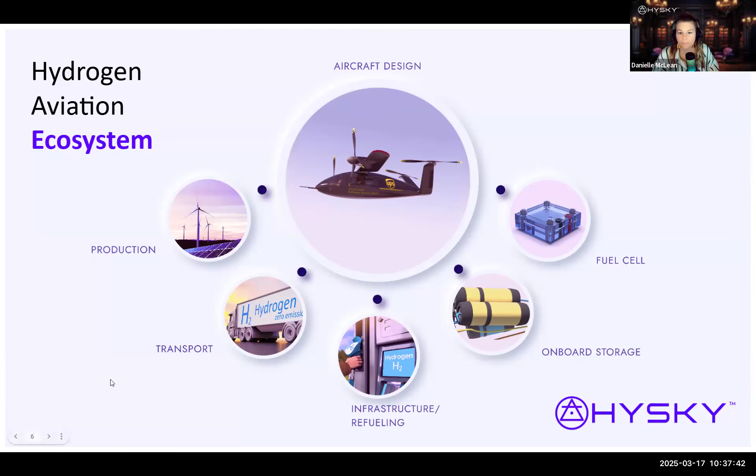Thank you, thank you. So speaking of that hydrogen aviation ecosystem, daily I am asked by somebody to introduce them to somebody else that I know. And we've been asked at least 100 times to build this ecosystem, to build this database. So we've started building it. And if you would like to be listed in this database, if you're looking for a product or service, or you're selling a product or service related to that ecosystem, then go ahead and complete this form. And I will stick the link in the chat.

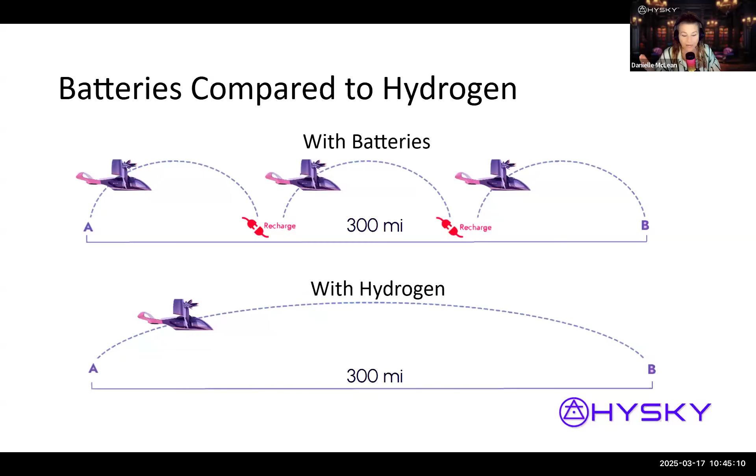Like I said, you can replace this eVTOL with a drone or a fixed wing aircraft. If you're looking at going 300 miles, you can trade out your distance for time and look at endurance. If I'm going 300 miles, I have to stop and recharge at least twice with batteries. On the other hand, if I'm using hydrogen, I can go from A to B, 300 miles on one fuel tank, on a fuel cell with a full tank of hydrogen. I can go without stopping from A to B. So that allows me to go to Dallas, go to Austin, go to San Antonio, and I don't have to stop and recharge. I like that.

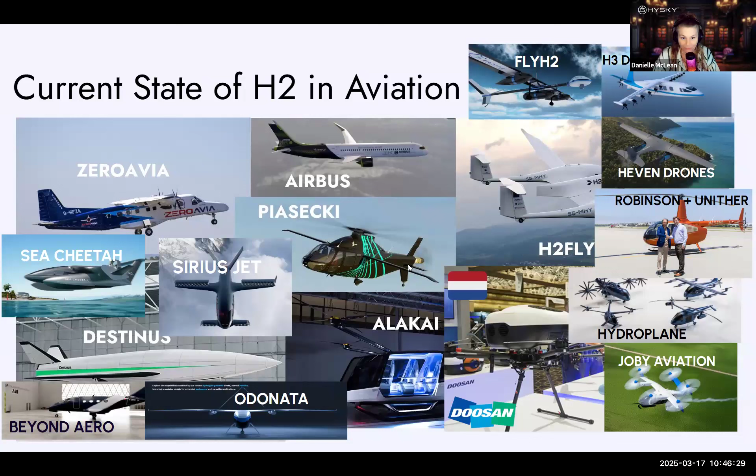And all of these aircraft are going to need hydrogen. Where are they going to get hydrogen? That's where HYSKY comes in. HYSKY's role is to bridge the gap. HYSKY was on there, thank you Dan. HYSKY's right there in the middle. I wouldn't forget John, but yeah, they're there.

It's okay, there's a lot on there. I know, at least I'm like, wait, I forgot Joby. And then I'm like, no, Joby's on there too. But yeah, so where are they going to get hydrogen? That's where HYSKY comes in. HYSKY's role is to bridge the gap between hydrogen and aviation.

There's a working prototype actually working in Hawaii, and it's powered by renewable energy. It's completely off the grid. It absorbs water from thin air and then electrolyzes it, and that can go to refuel an aircraft. You might say, well, that's not going to make enough hydrogen to fuel an eVTOL. Well, you can scale it. It's modular. You can use as many, and you don't need any infrastructure. This thing comes on a trailer.

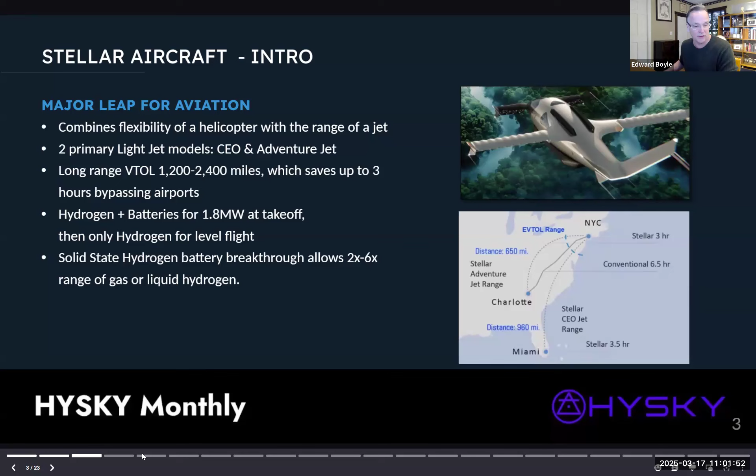So the solid state breakthrough we're talking about is potentially a 2 to 6x gain versus gas or liquid hydrogen. We've tested this - I don't know how many of you have used HydroSticks, which are very small capsules that a lot of drones start with. For some of our initial tests, we just took a HydroStick canister and replaced it with our powder, and we were able to get up to 6 times what a lot of drone users are using right now. That's what our partner in UConn is using, so we're going to deliver that to them as something to immediately extend their range.

So the team is something that impressed me right from the get-go. Alexei's family company has been working with Antonov for almost 100 years on creating some of the best planes in the world. The AN-225 has something like 120 world records for the largest aircraft. It carries their version of a Space Shuttle around on the back of it - it's down here, it has 6 huge turbines on it.

The president of Antonov actually came over and decided to join us as our aviation head. He's been designing all these planes, and he's come up with a medium size aircraft where we can potentially fit 19 people and still take off vertically. He's a fantastic addition to the team.

And we brought over a sales team that had been selling Cirrus aircraft, and they got busy and sold about 1.5 million in non-refundable deposits that we took last year. So we're able to fund a decent amount of our development so far on that money, in addition to regular fundraising. And then our pilot team - we have some fantastic Apache pilots, one was an experimental pilot, and another that's an FAA check pilot for United. Between these guys, we're going to be working on forming up our team flying out of Sikorsky Memorial here in Connecticut.

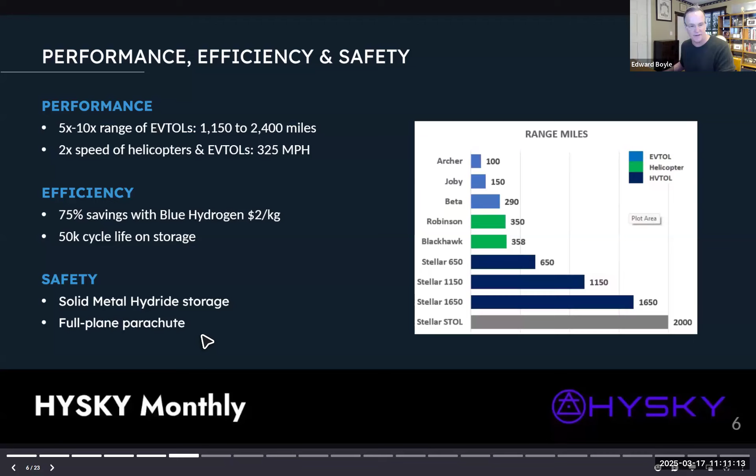We also have a full plane parachute. That picture I showed at the beginning of Alexei, he actually flew his private SR-22 from Portland, Oregon all the way to Ukraine. One of the reasons he bought it is it has a full plane parachute, one of the first ones with it. So when you have rotors up above, you definitely can't use this. This is one of the benefits of a fixed wing design, you can have a full plane parachute.

We were potentially talking with Chris Hemsworth as being our brand ambassador here. We ran into him at an FBO in Australia, and he was psyched about coming on in exchange for a jet. But then when we started dealing with CAA and everything, the deal got a little too rich for us.

The idea here is to be able to land on water. We have dust collectors on all the intakes, so this can land in a desert, go all sorts of places you would not take a helicopter. For the express jet version, we would take out the seats. We have a medevac version with a stretcher in there and a crane and everything like that. So we've thought through these designs quite a bit on how each one would be used.

There are 3 existing patents on the plane: the design of the wing, the overall design of the plane, and the powertrain. Two of them are actually totally in the clear, one is pending. We have other elements like this proprietary cooling, which is really critical for the fuel cells and the batteries. We'll be swapping out the original liquid hydrogen storage with the solid state, which is much smaller in size. We have a lot of other elements that have gone into this that are in the proprietary knowledge base of both Antonov and FED, and a lot of those were not patented in the Soviet Union, but they're all there for us to pick and choose from.

So the solid state, this process has been around for quite a while. It's been used in satellite applications in space for probably 20 years now. But we made some key innovations in being able to fit much more hydrogen within the lattice structure of the magnesium and the titanium. This fullerene we use, the C60, is pretty expensive if you buy it off the shelf, but we've come up with a process of making that from recycled tires that's going to make the whole process much more affordable.

Another thing we do is use microwave and ultrasound to heat the metal hydride at the particle level, at the molecular level. This is much more efficient than heating from the outside, like some techniques have been used in the past. So this is TRL5, it should be TRL7. We're going to use this in our flight in June, and we're going to start using this at some tests we're doing at UConn and Yale right now.

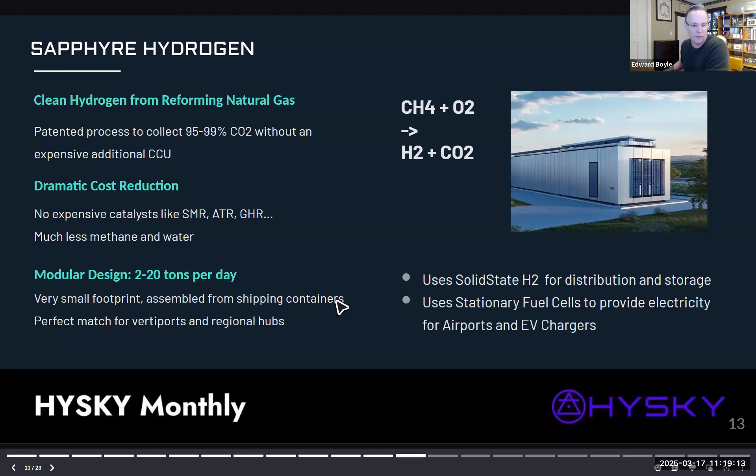So the markets for Stellar Jet are, initially, we're going after this private market where people will actually pay 10% deposits 4 years in advance. This is a very common thing when you roll out a new Gulfstream or other private jets. We get invited to present at the Palm Beach Boat Show and all sorts of places like that, right next to Czinger and all the hypercar markets. So we're actually able to sell these.

We just need to get the flying prototype up and make another big launch, and then we have 600 million in pipeline right now. A lot of people in India love this, but the people in India are immediately asking us to go to 10 or 19 seaters. This airline industry is just booming in India.

And the same thing — a big resort developer in Bali came to us. Australia is a very large market for private jets too, probably the fourth largest after Canada and the UK. We're getting a lot of interest out in Ohio, where Anduril and I guess Joby have set up manufacturing, so a lot of people want to put in vertiports out there and are talking to us about doing different plans.

So licensing is becoming a key part of our business. This might really kick in with the solid state, like way before we get the FAA. But the military and the first responder market, these guys will certify in up to 18 months.

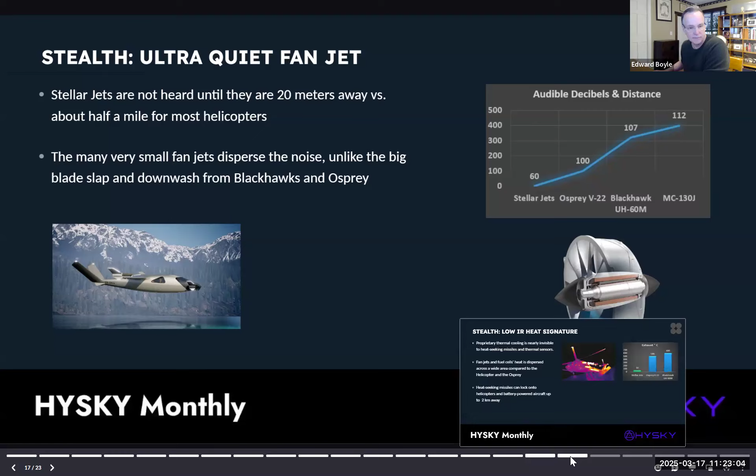The same thing with heat: each of those electric motors is going to have a little bit of a heat signature, but dispersing the heat from the fuel cells and batteries is going to be key, and we think we can do that and add on to that. But having this big JP4 turbine at the top is something they're never going to get away with on

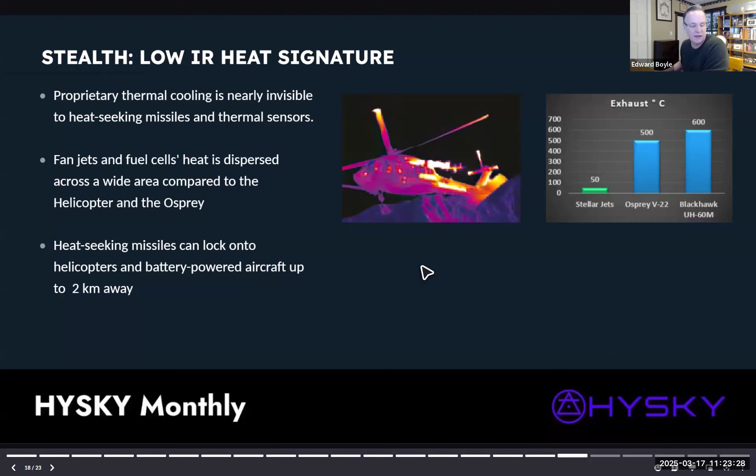jet fuel powered helicopters. Another thing, Alexei, being an aviator, knew the importance of having a pressurized cabin. This easily lets us get up to the 25,000-foot range, which is key for getting across the Alps. That's one of the main private flight routes in Europe, so being able to get over that range matters.

For missions, a lot of the people will, you know, the entire Special Forces mission will be flying 2-3 hours with oxygen on. That's not good at all for arriving at their mission in peak form. So they won't be doing that on the Stellar.

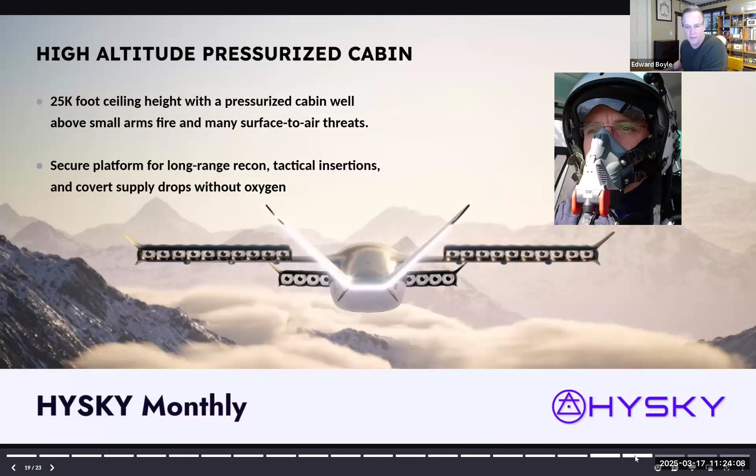So the medevac design is going to have a winch coming off the wing and probably have 2 berths within there. So the goal here would be to get 600 miles out or 200 miles out, be able to load the patient and get them back to a health facility without having to do a recharge or refueling at that location.

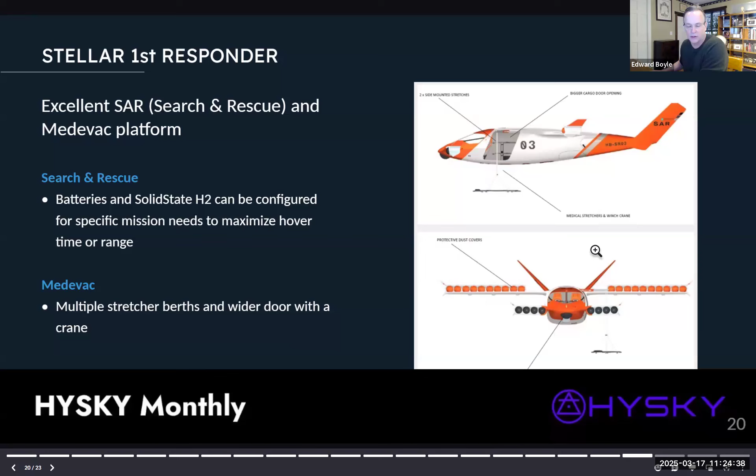So the development status so far, we're at the TRL 5.5 stage. That will go up to the 7.5 stage once we're flying in June.

The drones, if we go that route and really start selling those, we'll fast track this and get to TRL 9 pretty quickly, though each country has its own certification process for drones.

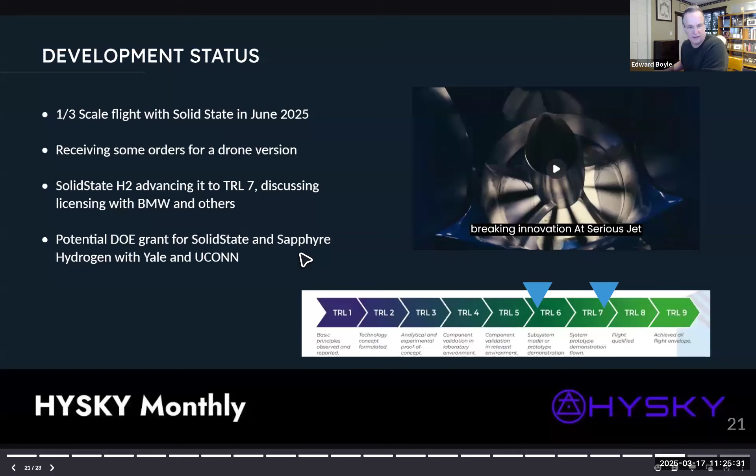The solid state, if we start licensing that to BMW, will also get accelerated to the 7 or 8 stage pretty quickly. And then these DOE grants we're working with Yale and UConn on will probably help us accelerate both the solid state and the Sapphyre TRL process testing.

So that was pretty much it for my planned part of the presentation. I can take questions now or show some additional slides.

Thanks so much, Ed, that was fantastic. Very cool to learn all of those things about Stellar. A lot of us have been wondering.

Okay, so lots of questions in the chat. I'm going to start from the beginning, and I think the first question that I saw, if this isn't the first one, forgive me. Kurt, thank you. Yeah, you bet. Thank you, a couple questions.

I'm interested in the solid state fuel that you're developing. So you're actually flying with a solid state hydrogen cartridge or generator, and you're producing hydrogen on demand from the storage media?

So there's two things. Solid state H2 is making this metal hydride container right here - that's magnesium, titanium, and carbon 60. We infuse that with hydrogen, and then when it's being desorbed, we heat that up with microwaves and use a little bit of pressure.

to get the hydrogen to come out of the solid form and feed the fuel cells right here. And you're getting an energy density of maybe 6 times batteries, something like that? 6 times the gas, 2 times liquid hydrogen - 150 kilograms per cubic meter.

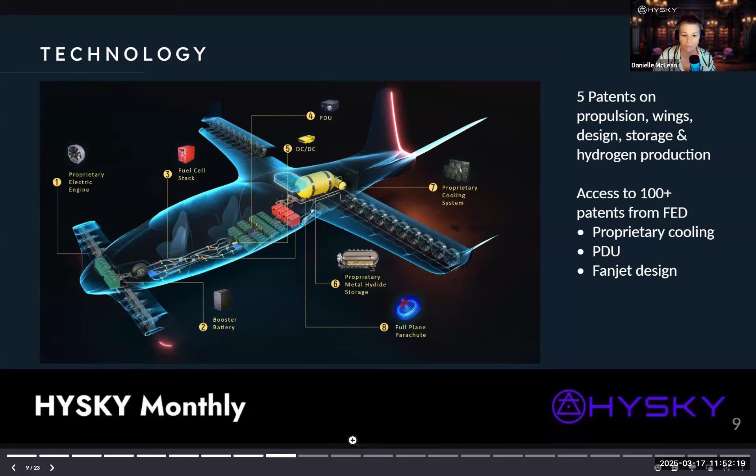Ryan, jump in if I'm incorrect, but he says, to clarify, is Solid State H2 the name of the company? I know it's not the name of your company, Ed. Your company is Stellar Aircraft or Stellar Jet. But yeah, is so there...

solidstateh2.com is the website, and yeah, we're just starting to raise capital for that separately. So if anybody's interested in partnering there, or investors interested in that area. So that's its own standup company? Yep. Okay, got it. Thank you for clarifying.

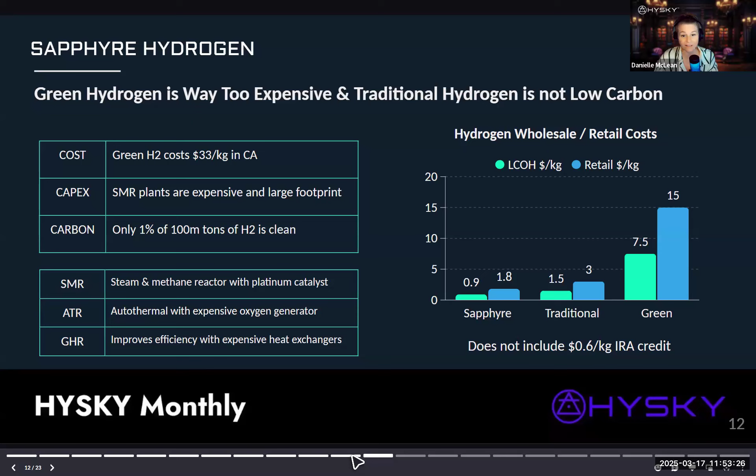And the same thing with Sapphyre. Sapphyre is a separate company under sapphyrehydrogen.com. Interesting, this is connecting some dots for me. Yeah, the CEO is not totally psyched about it. He wanted to keep it internally, and I'm just like, we can't sell products to the car industry and the truck industry and stuff from within Stellar Jet. We need a separate standalone company, and they should be able to raise money, maybe more money than Stellar can raise at this point.

Well, that solid state hydrogen, that is one I am very interested in. I'm also interested in the jet, but we've talked about solid state so many times on these webinars.

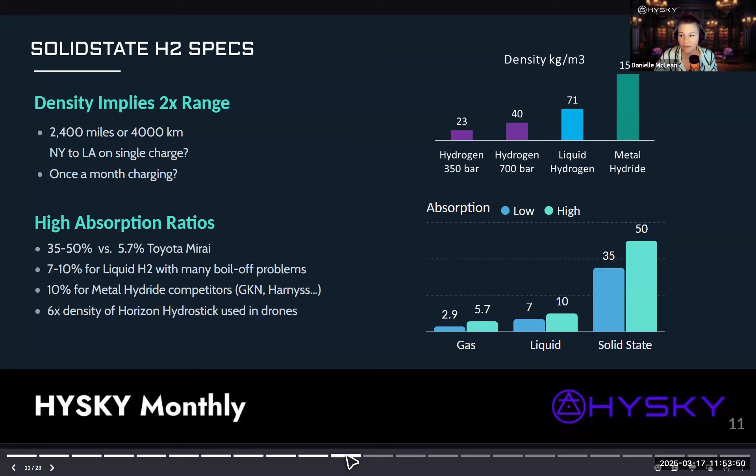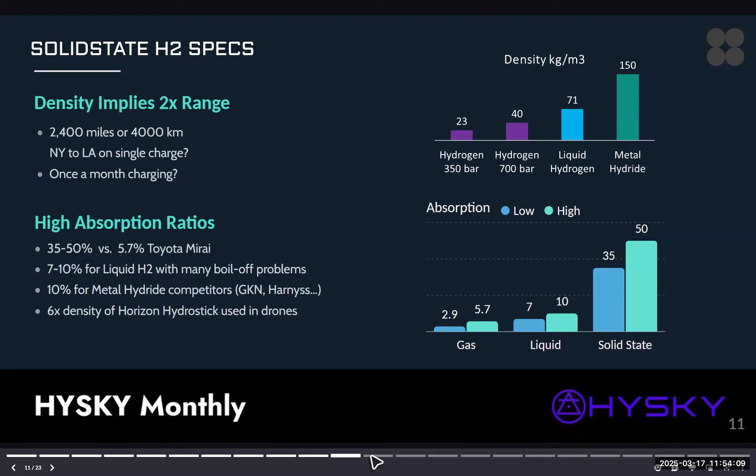Hey, Edward. Good talk, by the way. Very interesting. I've got a question about the weight of the hydrogen storage. Roughly how many kilograms are you holding? What you can share, I know some of this is probably proprietary. And then what's the weight of the hydrogen storage, including all the balance of plant, everything, refueling nozzle, everything, all the way to hydrogen on demand at the fuel cell?

Yeah, so this sort of design would be about 90 kilograms. Hopefully we'd have 40 kilograms, maybe it'd be 100 kilograms, and we'd have 40 kilograms of hydrogen in there. So that's sort of our base design. That would be the approximate width of the airplane, the current design of it. And stack two of those on top of each other gives 80 kilograms of hydrogen. What was the other question?

The what's the weight of the balance of plant, all the other stuff to make it work, the microwave systems and all the other stuff, the stuff that isn't the tank per se. Yeah, so that's the goal with getting to the 35% ratio, that 35% of the weight would be that. So yeah, then we'd be in a much better position than we were with the liquid hydrogen.

We'll have to go through a bill of materials for this now, because we were just sitting there with the H3 Dynamics guy that's selling these to drone makers right now, and the drones are going to be really sensitive to all these nozzles and everything. So we'll be going through that.